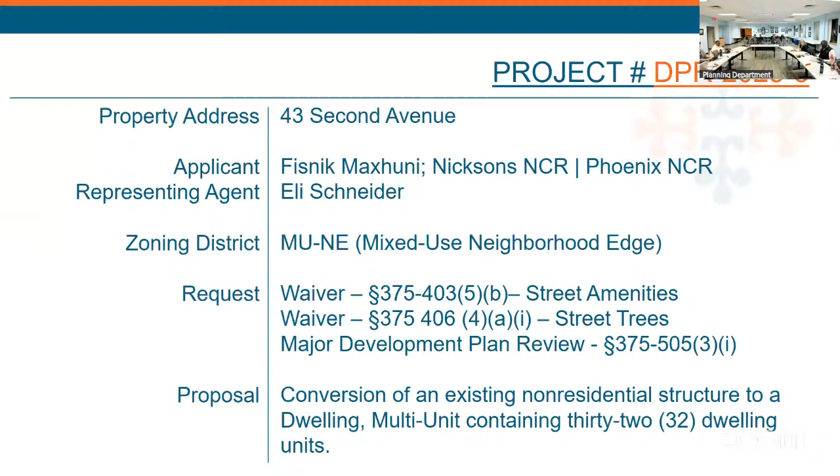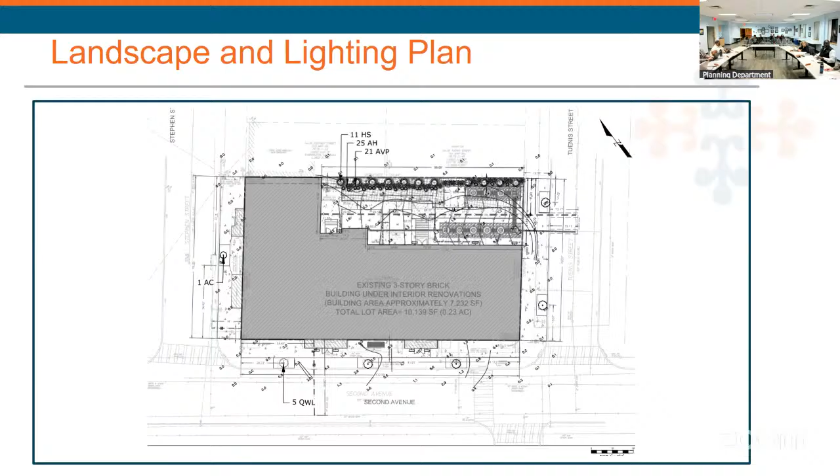It's the conversion of the existing school, which we discussed previously, first as a workshop and then a public hearing. So 32 dwelling units, and they're at a point now with departmental review that the water department can feel comfortable with conditional approval, and all the other departments have signed off. That's the building.

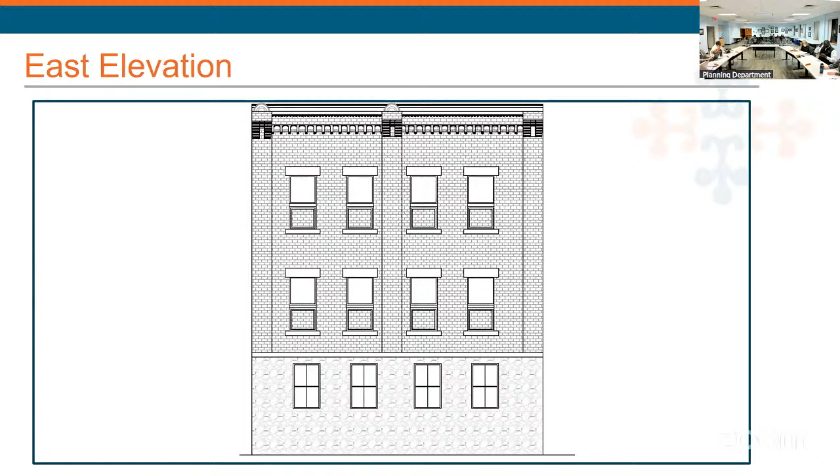They've made a lot of updates over the summer, put a lot of detail on what wasn't there previously, so good about the site plan. The only other condition in addition to the water department would be in their elevation set.

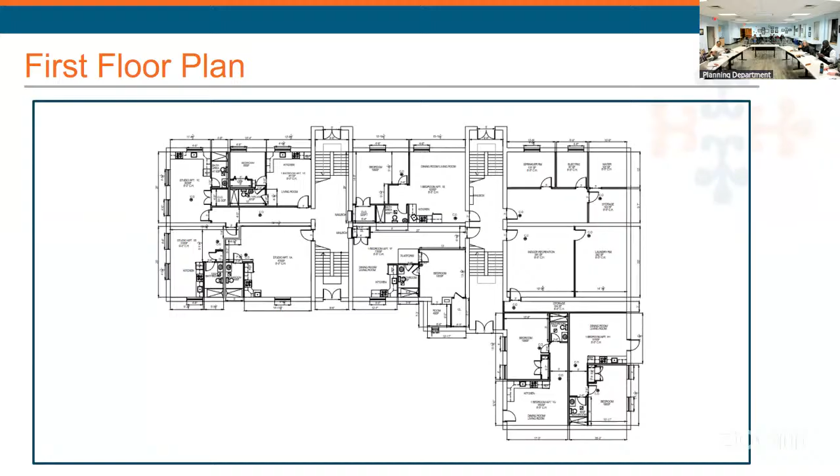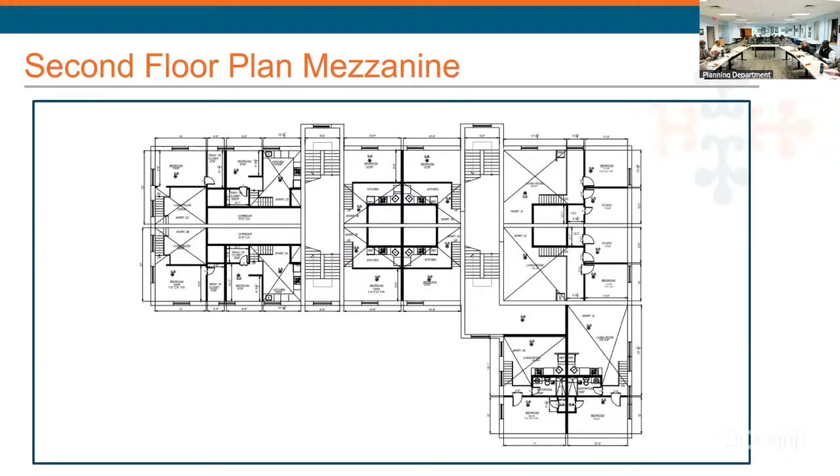They have one that shows the elevation painted gray and white, and it went before the Historic Resources Commission, and they denied the request for painting. It was kind of like a half yes, half no on the certificate of appropriateness. So we just requested that elevation be removed so there's not confusion that they're allowed to paint it. HRC determined they were not in character.

There's no public funding, so we didn't do any coordinated review. We did call it an unlisted action, so we drafted a short EAF, Part 2 and 3, for you.

Moving forward. Did we receive any public comment? There was a public hearing previously. That's what I just mentioned about the certificate of appropriateness and it being unlisted. So we would just include that bold part as a condition in our recommendation.

So it's a few things. The street amenities and street trees are kind of partial. They did include street amenities and street trees. They have 6 street trees where 8 are required - there's just not enough room in the right of way. Same thing with the street amenities, it's just pretty tight in the right of way.

So we recommend approval of those waivers as well as the neg dec and approval of conditions of the development plan review. Like I said, water, and they changed the elevations to just remove that painted elevation. Ms. O'Shaughnessy, do you have any questions for staff?

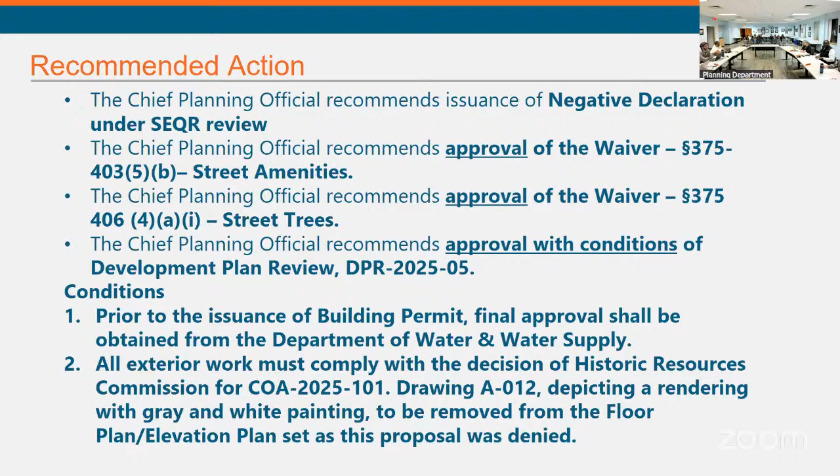Next for today on our meeting agenda is 84 Madison Avenue, which is a conditional use permit. Wesley, do you have a speaking word? I was here the other time, so. Yeah, come on down. A couple of updates.

We had electricians come by. Permits just got inspected, they passed. The permit should be closed out by the inspectors, or are going to be closed out soon. We are working with plumbers. We just got a 3D scan of the building that'll give elevations and structure and everything, which you'll see in the slides.

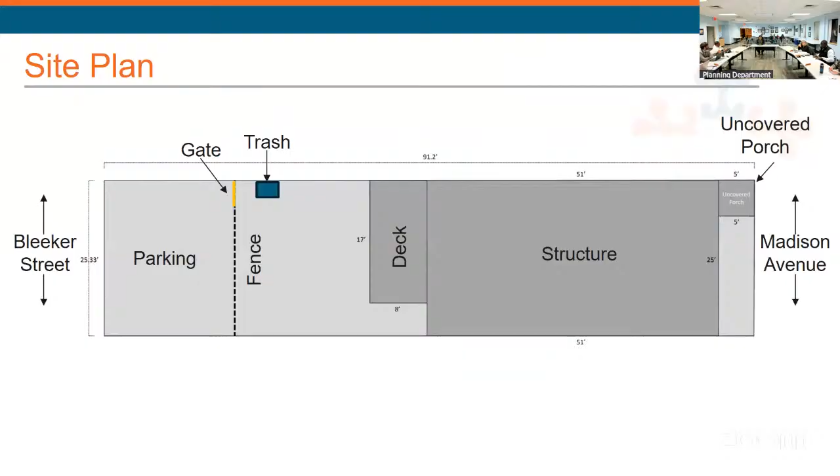I think they were updated to reflect it. Min Workshop did a 3D scan, accurate to the millimeter, in all directions. They scanned inside and outside. Electricians were Ungerman Electric. We're waiting to hear back from EW Tompkin for plumbing, they'll come in to get a retroactive permit and check all the plumbing.

I believe Ungerman Electric also checked out the HVAC on that level, and they said everything was up to code. So that was also in process, and I think that would close out soon.

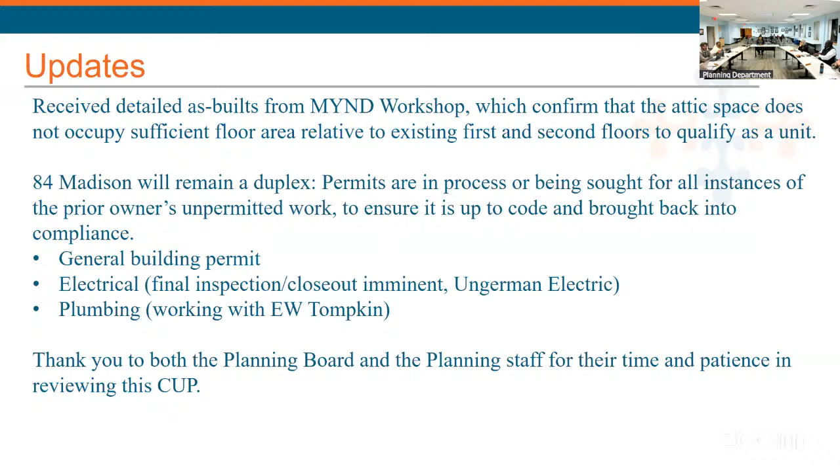As you can see, full scan range. I don't know all the details, but the structure shows where the stairs are, the bathrooms, and everything, where everything outlies, as well as the exit deck. So the entrance inside is the stairs on top, the rear is a second egress, and then the bathroom and kitchen area.

They checked all of the outlets, all the breaker panels, all the stuff in the area, and then they went to check the meters as well. They didn't have any questions. We said, you guys know best, and they checked everything they could.

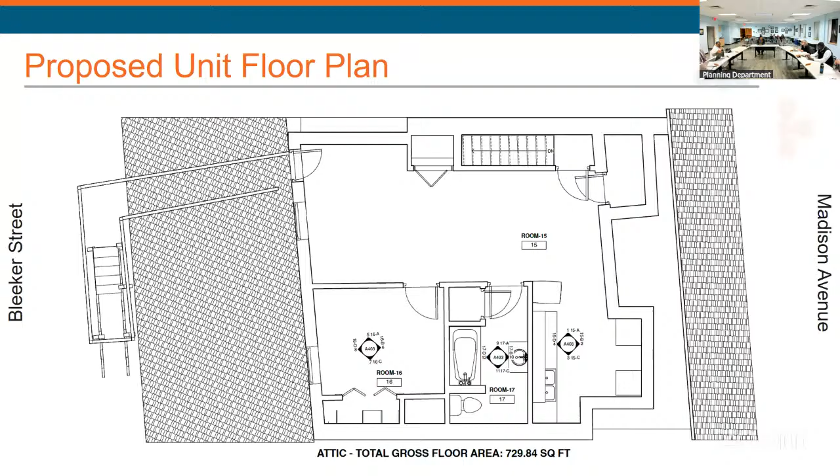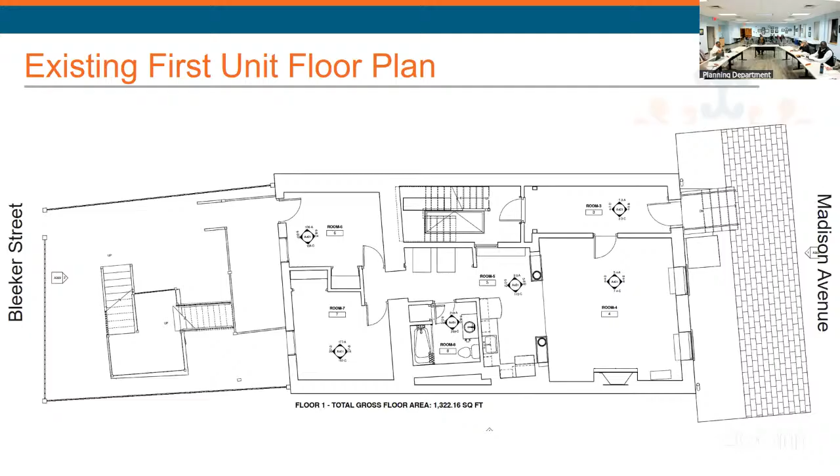This is the first floor, right? Yeah. First and second are pretty much almost mirrored, but as you can see, I don't see the measurements on there, but they have the square footage which shows the referencing. The scans they sent me earlier had all the exact measurements, but I think the notes would be in there, right? Yeah, okay.

As you can see, front entrance, right in the hallway, after the stairs on top leading up, and then on the back way is the egress going down, the connecting stairs from the third, and it just goes down, the stairs kind of loop around, and that leads to basically the parking lot in the back. I think that's pretty much it.

They checked all this stuff, and all the plumbing units are pretty much in the basement area, which EW Tompkin is going to be checking. I think there's only one boiler on the third level, which they're checking. They checked for the discharge, and after testing it, they're going to work on getting the permits and stuff retroactive to make sure everything's good. They didn't find any leaks, so they were pretty happy with it.

So they're going to probably open up a permit sometime soon. I guess really we're depending on their schedule, because right now it's a cold season and everybody's asking for plumbers right now, so, yeah.

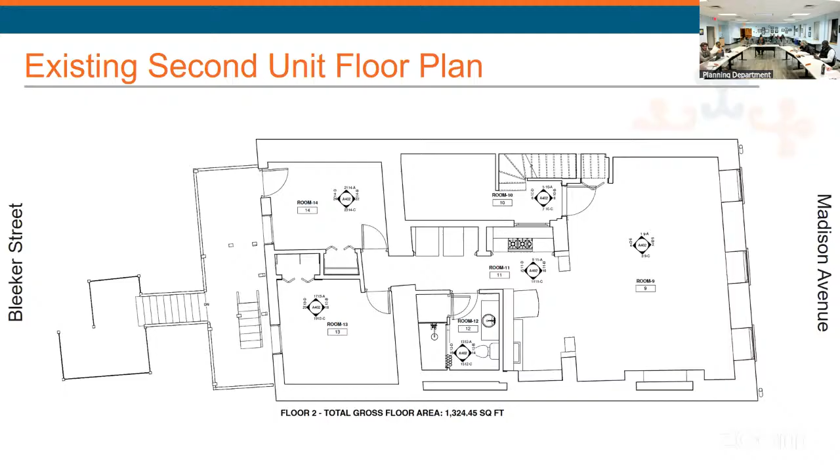All right, any questions from planning board?

I could just say from the staff side, communicating with Wesley, with the additional information from the scan, he understands it doesn't meet the livable conditions definition in the code. So he understands it needs to be 2, not 3, and that you're moving forward with the building permits to rectify that.

Yeah, we're just one step in trying to find everybody that can get the approval. Exactly, so on our side it's still the same recommendation as in October, for a denial of the conditional use permit for 3 units when the third is not a livable area.

I guess my question is, because it looks like that work to make it a third dwelling unit has been done prior to going through this process, what are your plans? What do you plan to do with that third area for the attic space?

First, we're going to do all we can to make sure everything's up to code. We're still going to continue getting the plumber set. We're going to talk with architecture, do everything we need to work it up and figure out things from there. First thing is to meet code, that's our goal right now.

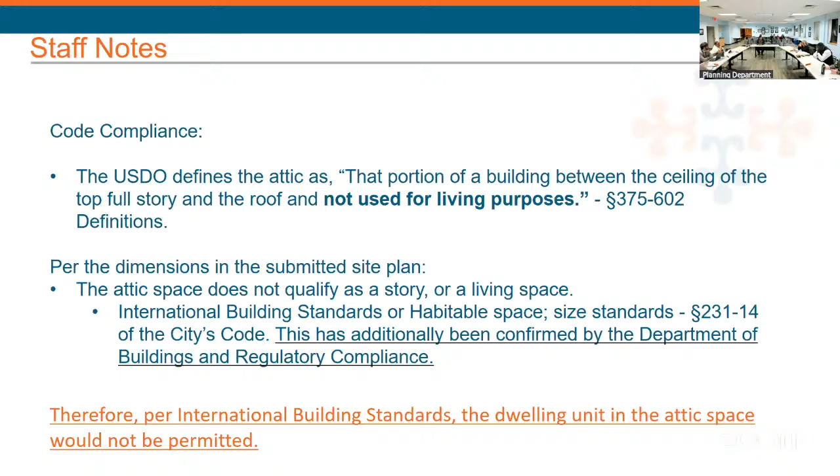I'm stuck, I'm sorry. I understand you're saying you're gonna figure it out from there, but it's not livable space, so I'm not sure as far as it being a third dwelling unit, but I could see it maybe being a duplex for the second. It's not livable space, but they didn't say it's not usable space. Right, but they're still getting plumbers and everything up there. Maybe a plumber in order for it to be usable.

If I heard you correctly, it's a heating issue, right? There's a boiler there, so the plumber's just gonna check that, make sure everything's good. And they're gonna bring it up to code, basically. I know they're gonna bring everything up to code. So basically, I think it's gonna stay as a duplex, and it's still a space, but at least everything's checked. We're checking all the boxes to make sure, because it was basically there before they got it, so they thought we can still use it for something. It just can't be just an apartment. Okay, cool, thank you.

All good? All righty. Is there a motion to deny the conditional use permit?

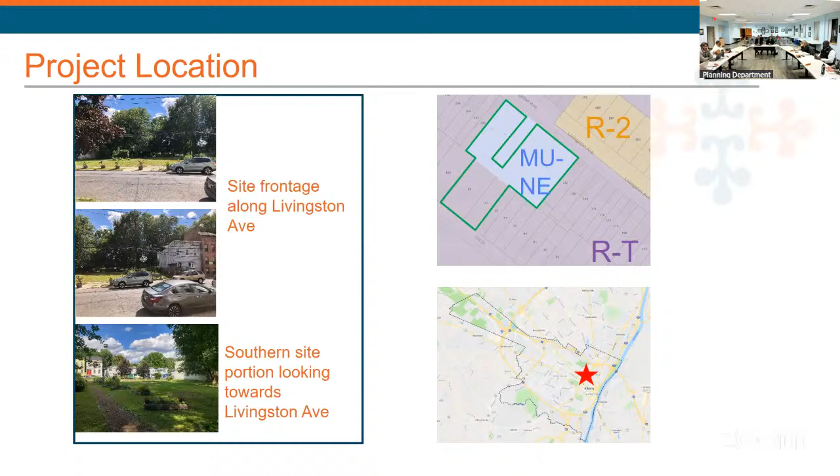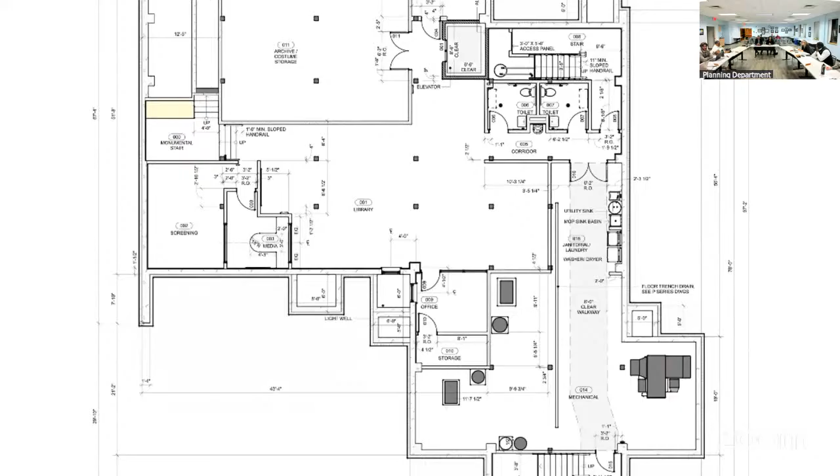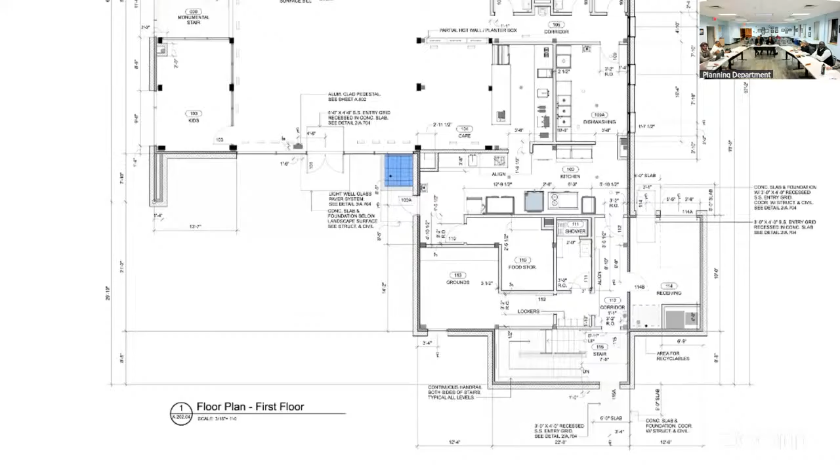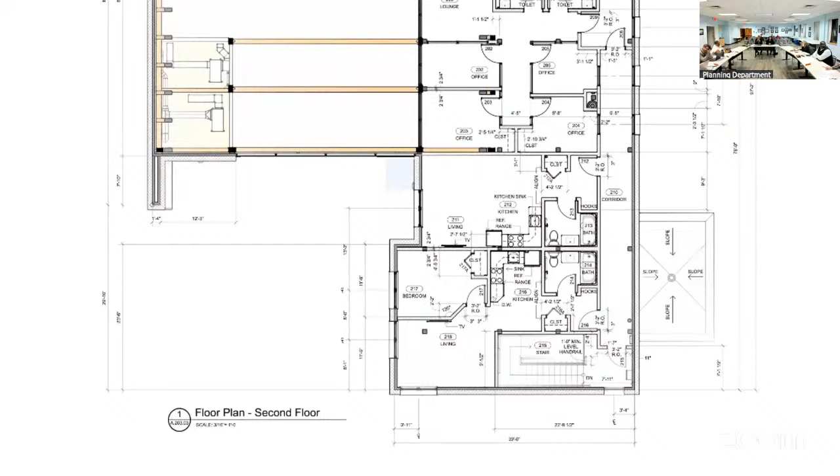Again, starting at the top of the sheet, we have a conference room with a wet bar. It's accessed by an elevator just below that, which takes you to a lounge and offices for the employees. Below that, we have one unit for visiting speakers and guests, and below that is a one bedroom for the on-site property management.

So our hours of operation will be Sunday to Saturday, 9 a.m. to 9 p.m., with 7 employees. The closest similar conditional use is Philip Schuyler, also Ten Broeck. It didn't make it onto this, I apologize.

Required permits will be the city building permit, city planning approval, grading, street opening, water and sewer, and because we have the kitchen, Department of Health. We don't anticipate any noise, light, or odors beyond the property boundary, and once per day food and equipment delivery. Here we have the site as it is now.

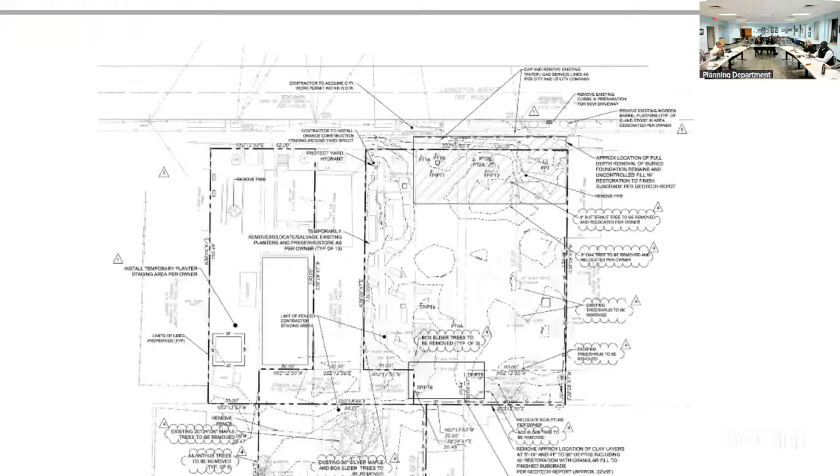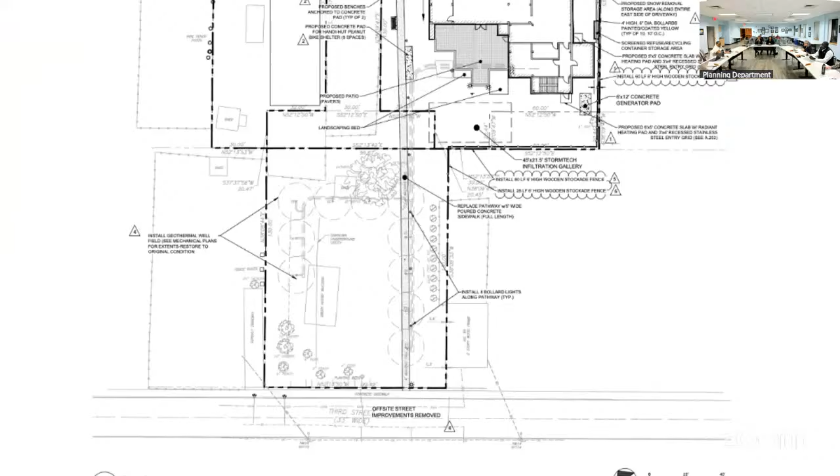In the proposed site plan, we have the proposed building, and outside we have the geothermal well fields. There's a current path that runs between 3rd Street and Livingston Ave that we will be paving and adding greenery on each side, as well as lighting.

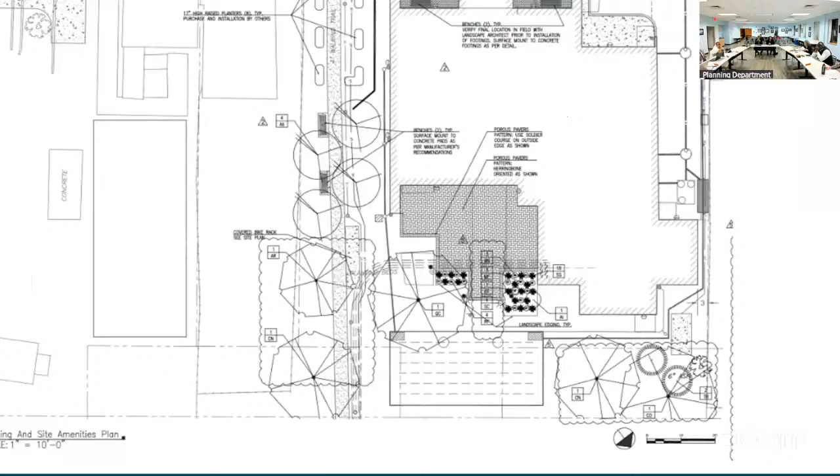Here we're showing our landscaping plan. This is a living building core design, so all of this is native plantings, with the idea of enhancing the environment but also not adding anything to it that would be detrimental.

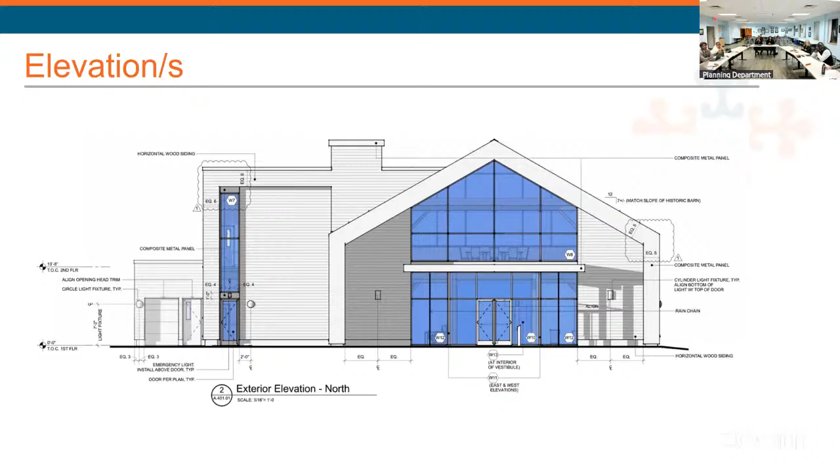So we anticipate construction to be 14 months. There's been ongoing meetings with the neighborhood associations, and the funding sources have changed since the last time we were here. We have NYSERDA, the Pat Fahy 2024 grant, McDonald Fahy funds, Empire State Development, and monies from the First Presbyterian Church. And as we spoke before, there are 2 dwelling units.

Any questions from planning board members? Can you remind me how deep your geothermal wells are? 400 feet.

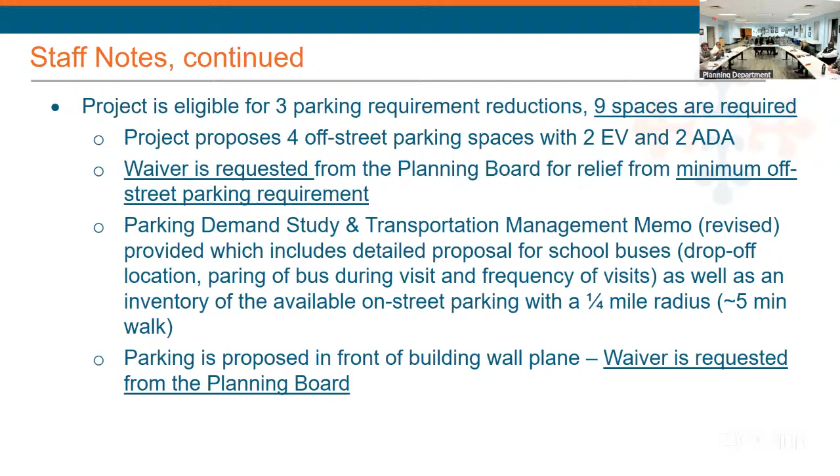The next deck, as I mentioned, we did a coordinated review. There's thorough communication with SHPO, and that's ongoing due to archaeological studies, so we'll see that in the future. But we recommend negative declaration, approval of the 2 waivers, and due to some uncertainty with funding sources and the continuation of the archaeological review, we're recommending a 2-year approval rather than a 1-year for both the conditional use permit and the development plan review.

With the conditions of final water department approval for building permits, and then further down the line for the certificate of occupancy, just to do the lot consolidation, because it's all those little parcels together, along with the city-owned alley. So there's a lot of recommended action.

Any additional questions? What's the largest sort of gathering space as you now reconfigured the property?

Inside, the largest gathering space is on the main level - that's the event space that you see there. If we zoom in, we probably can see the dimensions.

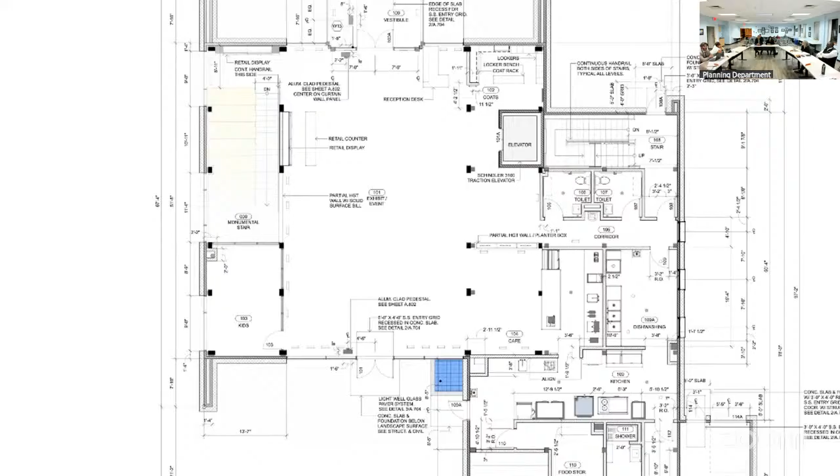Less concerned about the square footage, more thinking in terms of actual use. How many folks would you want to put in there, say for a fundraiser? What's the maximum capacity? Depending upon the setup, you can easily fit about 300 people, maybe 200 to 300, with high top tables for networking. That's about 7 square feet per person.

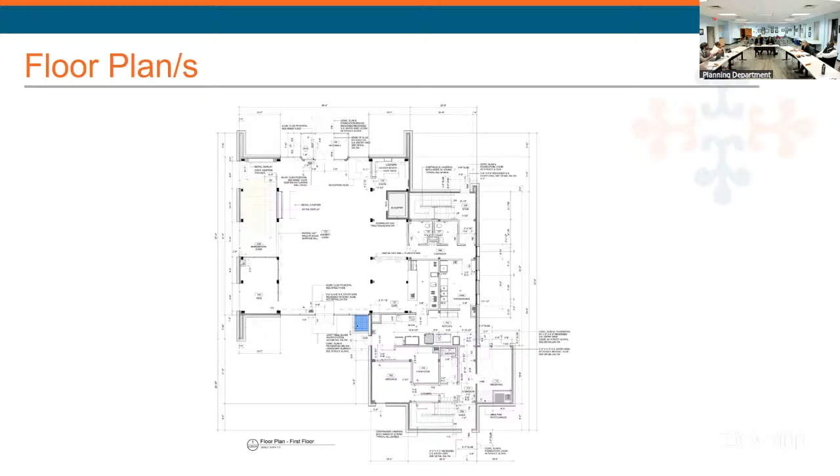We're probably just a little shy of that, because you're a little shy of 2,100 square feet, but you're pretty close. Let's say 250. This event is happening on a Friday evening.

Where the heck is everybody going to park that's coming to support the institution if we don't have any parking? Well, where they would come to park, what we've shown in our study is

there is an excessive amount of street parking along Livingston Avenue and 3rd Street that is within walking distance. The chart in our engineer's report includes quite a few. Most of the neighborhood residents we're concerned about primarily have off-street parking, driveways they have available. But for the bulk of individuals, they would park on the streets.

Let me rephrase my question and ask a second one. Metropolitan Church is having revival, Tri-City Revival, on that same Friday night, and you want to have your fundraiser. It slipped your mind to talk to Pastor Johnson and coordinate this. It's the same day. Where are your folks parking? Not in their free parking.

Yes, they are well equipped with parking. We certainly are, but I'm not concerned about Metro's parking, I'm concerned about yours. So when we went through the weekday parking, they did a study from 4 to 5 p.m., which we know is pretty much prime time. There were still 112 spots on Livingston, and between Livingston, 3rd Street, 2nd Street, Bird Street, Colonie Street, Lark Street, and North Swan, which is all about a 5-minute walking distance, we got about 270 average available parking spaces.

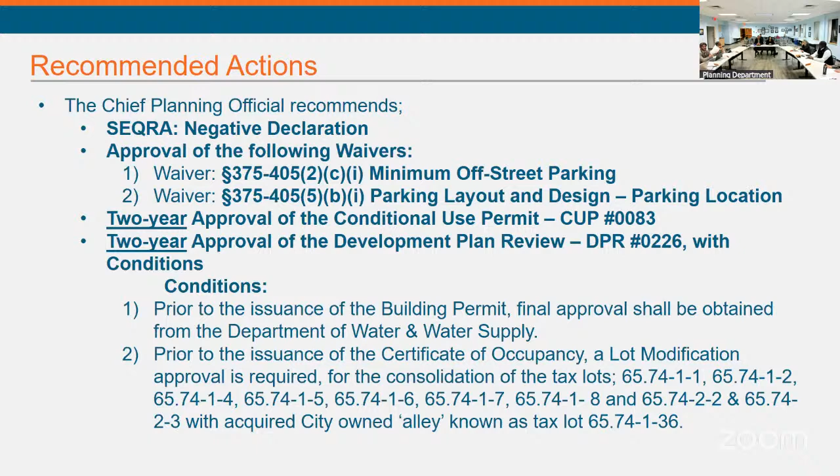So moved. It's been moved and seconded to approve the development plan review for 2 years. All in favor, please say aye. Thank you, this is a huge milestone. Thank you.

Last one. This is for 55 Mill Road, development plan review. Niagara Mohawk, AKA National Grid. Are you Allison? I am, yes. Hi Allison. You guys are looking to replace and upgrade existing public utilities, minor gas distribution assets at National Grid's existing Normanskill Station.

We'll keep you safe. Keep you warm. It's going up. All right, the floor is yours.

Thank you all. You may recall we were here a couple of months ago doing some work at the same location, 55 Mill Road. That was a project for a portion of our existing natural gas pipeline replacement, an emergency measure due to some land movement activity in the area. This project before us tonight is for an upgrade of our existing gas regulator station - same property location, different project.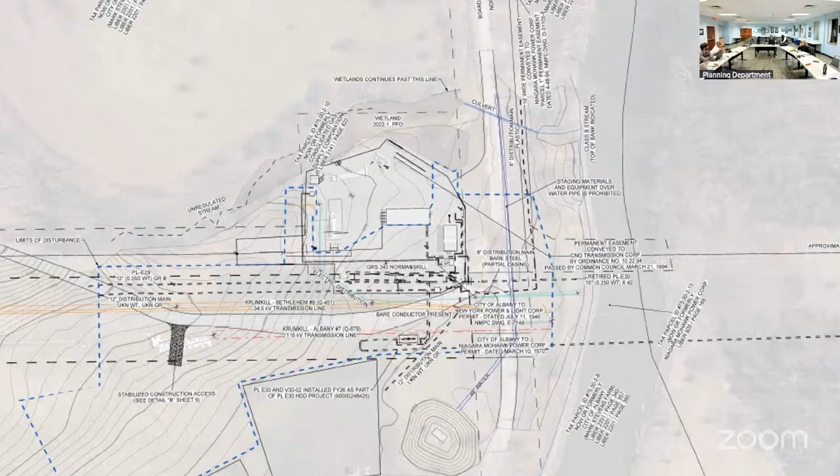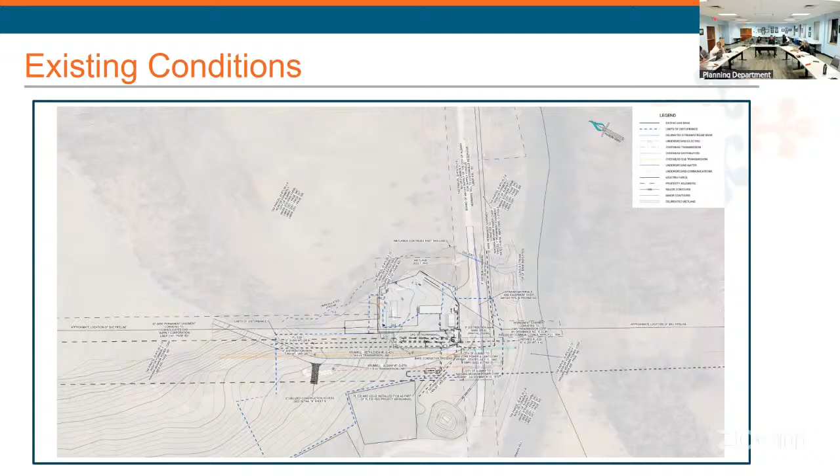Just give them a lay of the land, Andrew. Yeah, so this site takes the location from BHE gas transmission. Currently there's only a 45-pound regulator station. Due to reliability concerns, we're looking to add a 24-pound regulator station to reduce any risk of a low pressure situation in a high demand condition, which typically revolves around extremely cold temperatures.

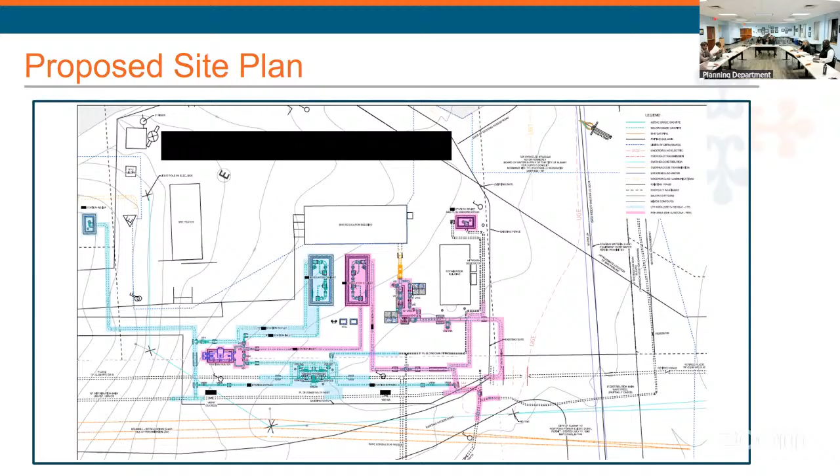The black rectangular buildings are the existing BHE buildings, which we're planning on tying into. On the BHE side, there'll be a new riser structure, a new demarcation point where their assets tie into ours. The pink piping shown would be the new valve, valve 2901, to the right of the rightmost regulator cabinet.

Following that, the pipeline will run into the 45-pound regulator cabinet as well as split and run into the 24-pound regulator cabinet. Both regulator systems will share the same water bath heater, shown and notated as the station heater. Both systems will have the same relief and will tie into pipeline E29 and E30 respectively.

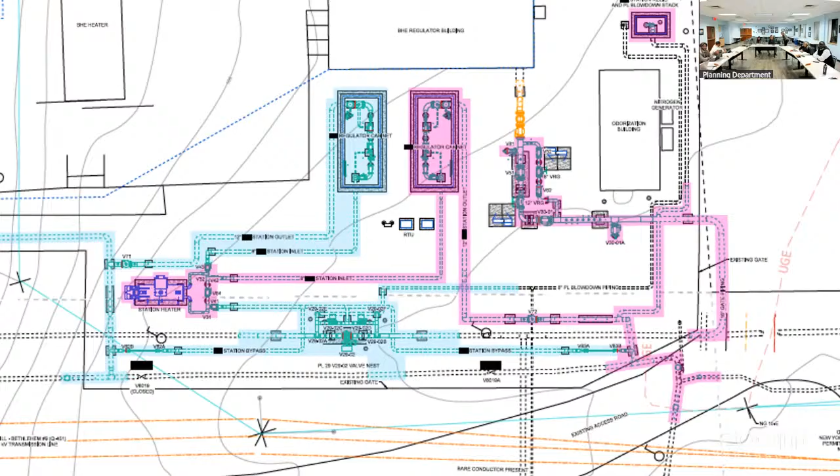And then here you can see our proposed limit of disturbance plan. The orange indicates the temporary workspace agreement, and you might recall this looks similar to what was utilized for the E30 HDD project, just a little bit smaller footprint here, given the nature of the construction being a station as opposed to a pipeline job. The green on the left-hand side of the station is the relief location, which we are looking to seek a permanent easement for. The pink is the permanent agreement with BHE, and the blue is for a permanent agreement with the Albany Water Board.

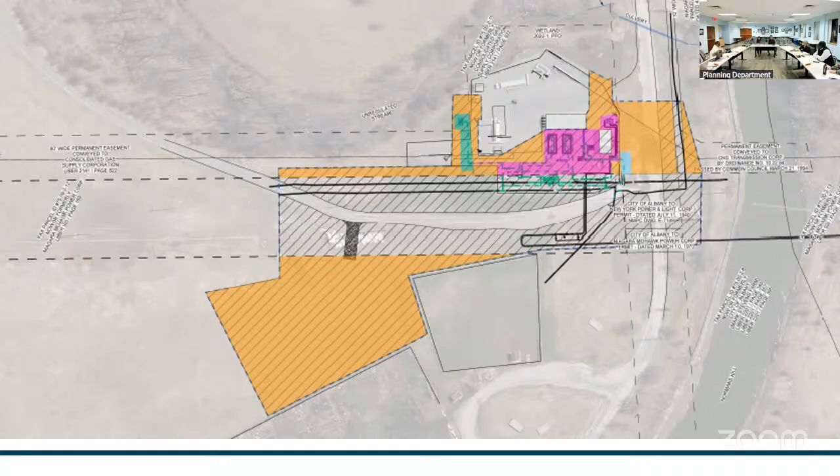So the property is located in the Land Conservation District, but we are also located in the Normanskill overlay. And so due to the area of disturbance, the amount of disturbance, that's why we're triggering the site development plan review. Just some additional information on our PowerPoint.

We do plan to stick to the 7 to 7 construction hours. However, we do intend to seek a waiver from the building department for activities that have to continue on if the work is progressing past those hours. We will seek a waiver from the building department to allow that work to go forward. One example is mandatory 24-hour pressure testing — you can't stop it in the middle of it. We did seek a similar waiver for the PL E30 project. My understanding is that we would do that after completing our planning board review process and before applying for our building permit.

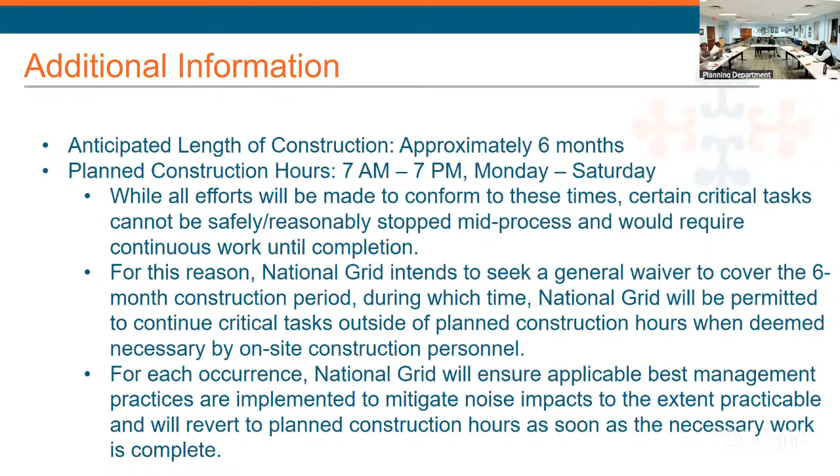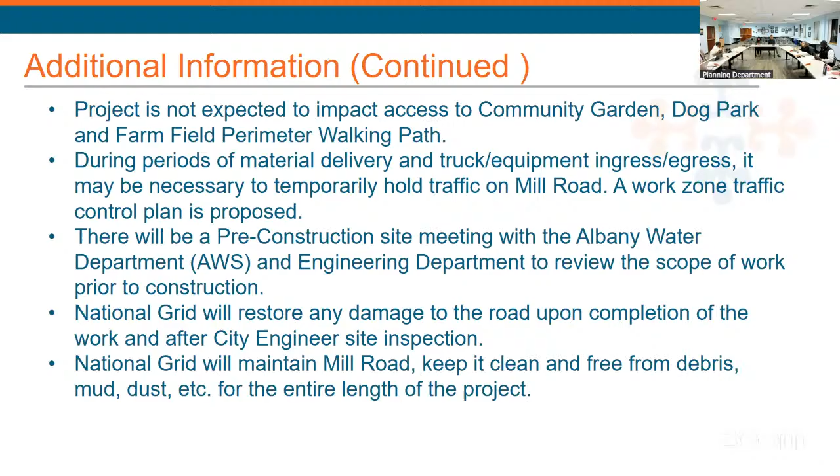We also know that maintaining public access to the community areas around the project site is important. During periods of material delivery, truck and equipment ingress and egress will be controlled so that there's only temporary impacts, where we'll hold traffic to allow those necessary truck movements to happen and then allow the ingress and egress to resume. We did include a traffic control plan with our project submission. We have one sheet from it here, and that has been uploaded to the online project portal.

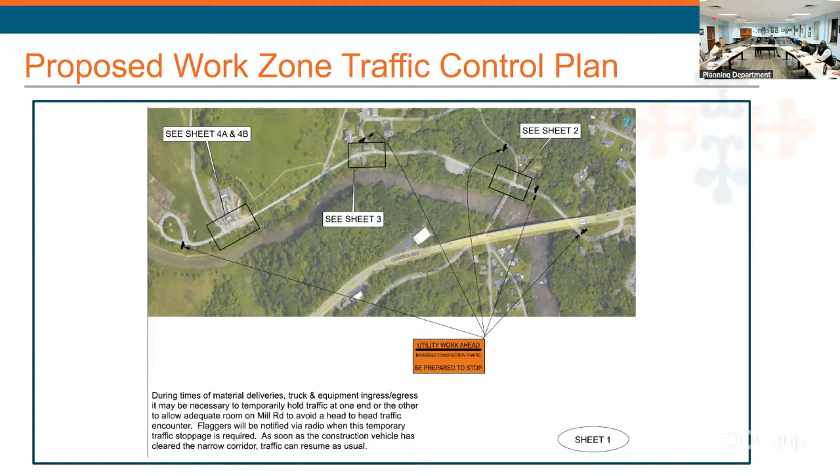Thus far, we have received some written comments. I believe the project is still undergoing department review. We have received some comments from the engineering department, and were offered the opportunity to participate in a recent technical review committee meeting, which was really helpful, explaining the interplay between this and the prior project we had at the location. So we were able to give some verbal responses on the Department of Engineering comments at that time, and we did submit a written comment response document to close that loop.

We also have received comments from the city water department. We've provided a partial response to those comments, including an updated SWPPP, a full stormwater pollution prevention plan, and revised erosion and sediment control plans. There are still a few comments we're working through from the water department that relate specifically to the site plan sheets, and we're hoping to reach out to see if the folks at the water department would have a call with us to clarify some of those comments so we can provide a final response.

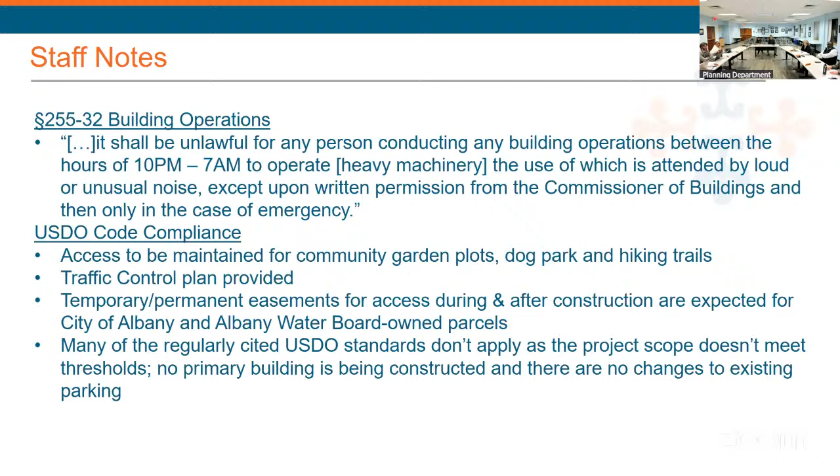Otherwise, most of the code does not apply because there's no new structure and no new parking, so it's pretty straightforward as far as the staff approach.

The water department was in last week providing comments, and we got the stuff yesterday for water department comments. They're happy to reach out or put you in connection with Lisa Merwin if you don't already have that, to talk through it a bit more.

DGS and engineering comments kind of overlapped, and we discussed them in person at the TRC meeting. Allison replied in the application portal today. We'll notify building and regulatory compliance, building code, when the time comes. Since we're still working through that, at this time we just recommend no action or deferral, but I assume it'll be pretty quickly remedied when the time comes.

Any questions from the board? Is there a motion to defer development plan review, DPR 2025-31? So moved. Is there a second? So moved and seconded to defer the development plan review. All in favor, please say aye. Aye.

Great. Hope to see you all back soon. Thank you. Thank you. I just have one question.

Are the comments from the water department, your responses, in the folder? I may not have gotten the one from yesterday, but I saw the water department comment. I didn't see your responses. We did just upload it, I think Friday, and it's a partial response to those comments. They had, in their one comment letter, comments on the SWPPP and comments on the site plan. We did provide a response to the comments on the SWPPP with an updated SWPPP and updated erosion and sediment control plan, and we intend to supplement it with responses to the rest. I believe that's the only remaining comment left to be addressed.